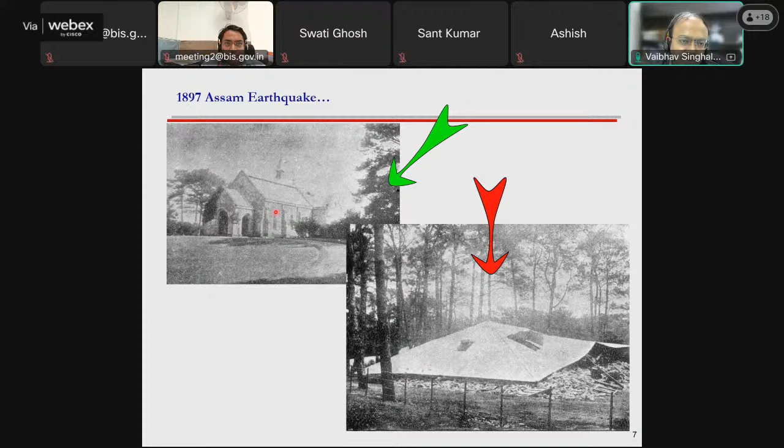So just have a quick glimpse. If you remember, in 1897 - of course you have not heard about this, but if you read in some books - one of the great earthquakes changed earthquake engineering around the world and also in India. This earthquake was felt at this location in Assam, and the shaking or intensity was even felt in Gujarat. There were numerous examples. At that time, masonry was the most popular construction method, and masonry performed quite poorly. You can see photographs of before construction, after construction - poor performance of masonry everywhere.

Even in the earthquake of 1934, after about 40 years, masonry performed similarly, quite poorly, in most earthquakes. Around the world also, in US, California, Japan, at many places, you will see similar pictures that buildings did not perform well.

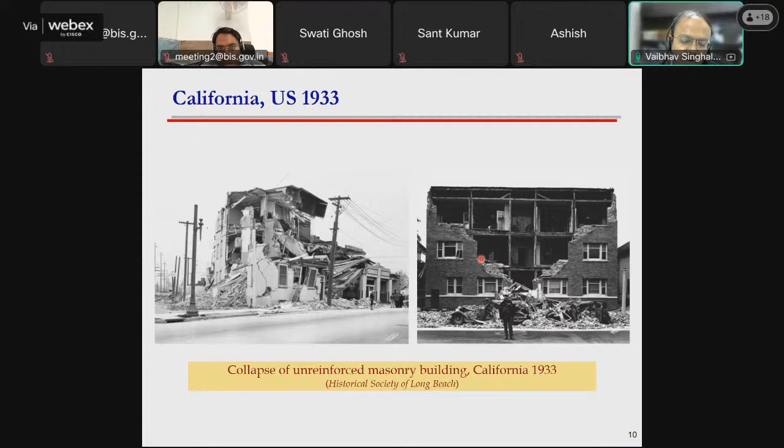So as the previous speaker was talking about, being an engineer, your role is to ensure safety. So it is important that we learn about masonry and ensure safety.

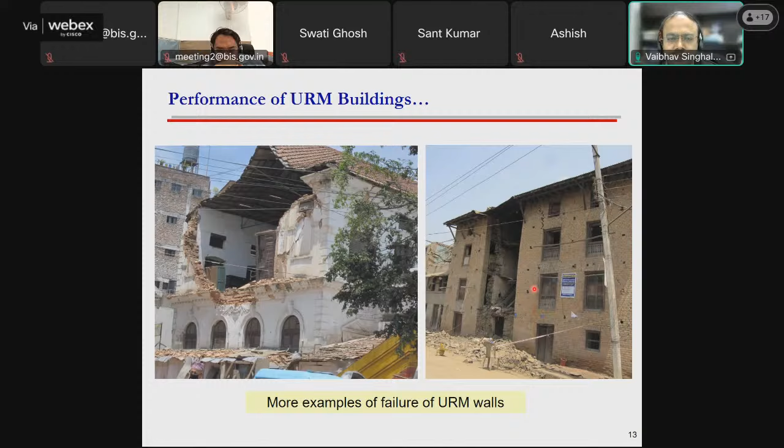Now some students say, sir, you're talking about 100 years ago, 125 years ago, but what is the current state - how are our masonry structures performing in earthquakes? So in the recent earthquake in Nepal, 2015, again we have seen similar pictures. The masonry structures completely collapsed, either during the earthquake or during heavy winds, heavy forces, or because of deterioration, poor maintenance, durability aspects.

So always we are seeing the same story - poor performance of masonry buildings. So that is what BIS is trying to address now, to strengthen our masonry codes through NBC, through specialized codes, where engineers can learn how to make good masonry buildings, either in a zone where earthquakes are not very prominent, or in areas where earthquakes are also very frequent. And you should also understand that masonry in India, and also in major developing countries, still always remains a first priority. Many constructions in villages, in rural areas, in urban areas, are done using masonry, or in some form we are using masonry - either as an infill or as a load bearing member.

So now talking about this NBC, where we are discussing the structural design aspect, which is Part 6, in which we have Section 4, which focuses mostly on masonry.

Coming to the scope of this NBC part 6, section 4, it gives us detailed guidelines and design aspects for unreinforced masonry, load bearing and non-load bearing. If we have infill walls or non-load bearing walls, it covers how to design and fix the sizes of these walls, and how we can select the material.

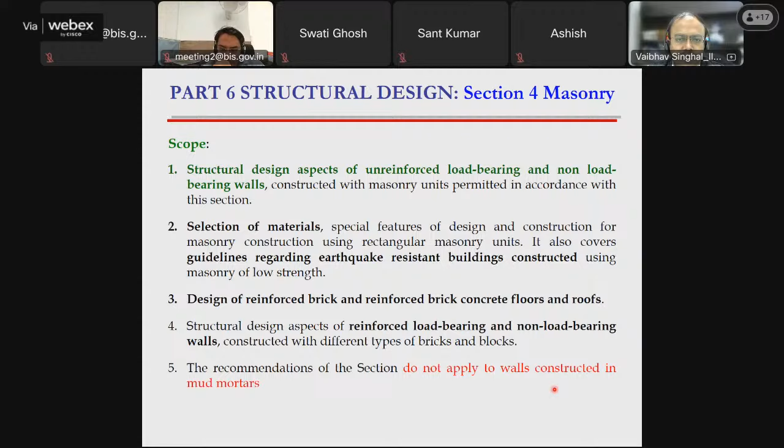This recommendation and the code section do not apply for walls made using mud mortar. Earlier, in many villages, people used mud mortar. It is not covered because mud mortar has different behavior and very low strength, so the code discourages use of mud mortar for structural masonry.

Whenever you start any design, you think about what kind of material you can use, whatever is available nearby. Nowadays so many types of masonry units are available - clay bricks, red clay bricks, fly ash bricks, lime bricks. The code gives good freedom to use different types of blocks or bricks.

You have also seen AAC blocks, autoclaved aerated cellular concrete blocks, which can be used. Concrete blocks and stabilized soil blocks can also be used for construction of masonry buildings. Some types of bricks are not allowed, like previously used masonry units, unless they are thoroughly cleaned. Gypsum partitions can only be used for non-load bearing construction, not for load bearing.

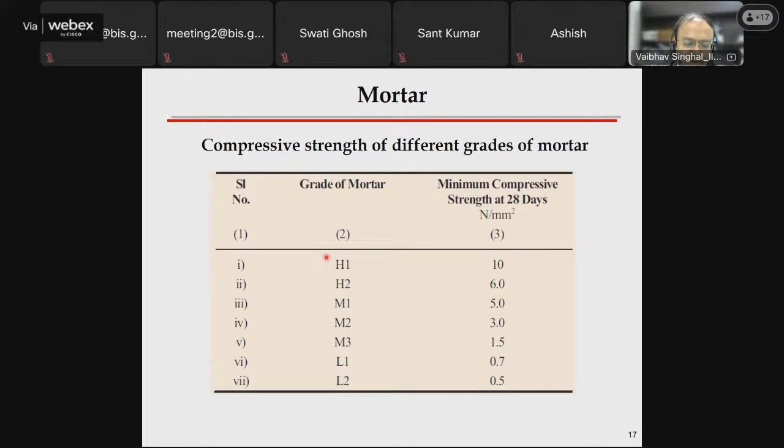Coming to mortar, I hope you all know about it - mortar is a binding material which binds two brick units. Mortar has been divided into different grades, starting from H1 to L2. H1 means the higher grade with higher compressive strength. H1 mortar requires minimum strength of 10 MPa, and L2 is 0.5 MPa. Depending on the type of masonry construction, the code provides guidelines on which mortar is good for which type.

The code also provides a tool - if you want to choose an H1 mortar targeting a strength of 10 MPa, it tells you what proportion of cement, lime, and sand you should use. This is how the code provides detailed guidelines, so you can get all the information at one place. That's the beauty of NBC 2016 section 4 for masonry - based on requirement, you can fix the mortar proportion for construction of masonry buildings.

So which mortar should you use? If you're using mortar for plaster or render, you have to use at least a mortar grade more than M3, preferably M2. Without protection, if there is no plaster, you have to use mortar of M2. For load bearing walls, it is set at M3 or preferably more than M3.

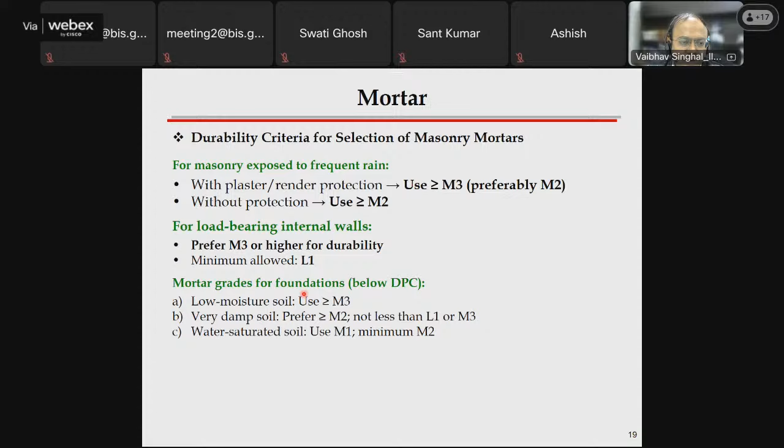Minimum code allowed is L1, but we generally suggest the structural engineer should use at least M3 grade mortar for the construction or suggest for the design. For foundation, one can use M3 mortar. So this is all covered in the NBC.

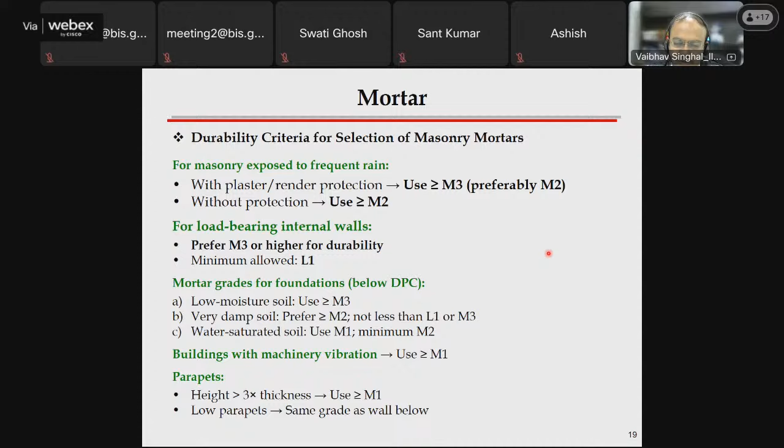I will not go into detail, otherwise it will take a lot of time. So all these recommendations are given in the code as to which type of mortar you can use, depending upon the durability aspect and the exposure condition of a building. Similarly, we have concrete grades for different exposures, specifying the minimum grade of concrete you can use. So similarly here also, you can fix the type of mortar.

Coming to the actions, the loads, how the loads are transferred and what type of loads a wall can be subjected to. The wall mainly resists three types of forces. You can have a vertical compression, as shown here with the green arrows. Masonry walls can have a vertical compression, and they can also have out-of-plane shear and bending.

Out-of-plane forces can be there, and they can lead to eccentric vertical load, due to either eccentric vertical load or transverse load, and the wall can also have in-plane shear. Out-of-plane loads are more common, especially during earthquakes, during wind, and during other kinds of loading. So you have to design your wall for all these three types of forces.

For a normal masonry building, the compressions are more prominent, so you have to take care of compression. But if the loads are eccentric, and if you are designing a building in seismic zone 5 or seismic zone 6, you have to consider the in-plane forces and the out-of-plane forces because of the earthquake loads and the wind loads also.

Now, walls have been primarily classified into two categories. If you see NBC or IS 1905, it says bearing wall or shear wall. Bearing walls are prominently designed for gravity loads, and if the walls are subjected to lateral loads, we call them shear walls and design them like a shear wall.

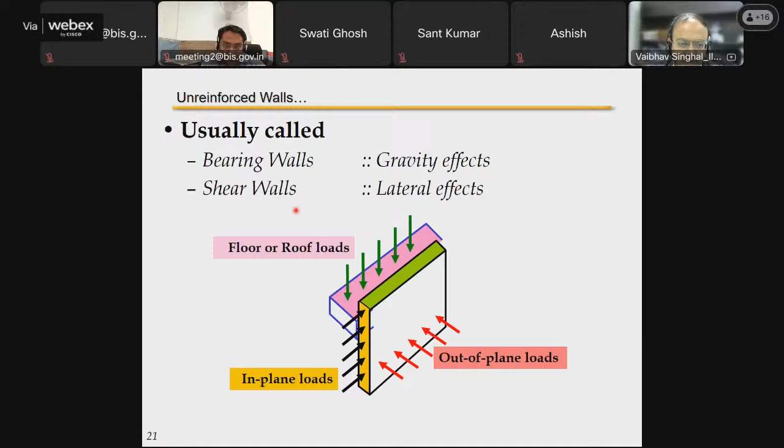The code starts first, either IS 1905 or NBC 2016, with some general design considerations - that being an engineer, first of all you have to ensure that the building or wall satisfies some minimum requirements to ensure the stability of the structure, so that you can have proper support.

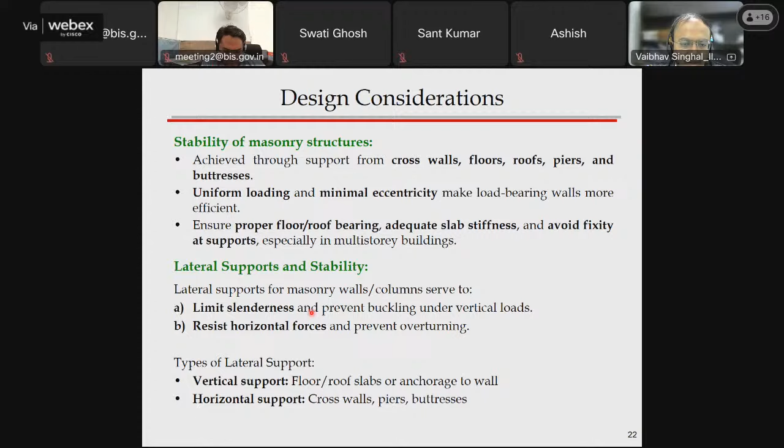You should have uniform loading and minimum eccentricity. So it is important that you start with the initial planning in such a way that you can ensure good stability. You can provide some lateral supports so that the slenderness can be limited, and then it can have some good resistance to the horizontal forces.

I will give you some examples of what the code means. Suppose you are having a slab which has to be supported over a wall - the code says the slab should have at least 90 mm of support. If that is not possible, you should put a sufficient number of anchors so that the slab or beam is properly supported over the wall.

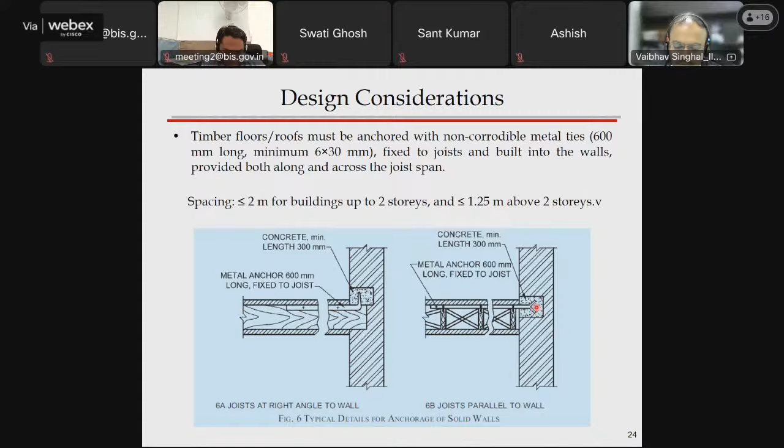Some examples - suppose this is your wall and this is your timber floor or different type of floors, this is how it can be connected to the masonry walls. Some more examples of timber and how it can be connected to masonry walls. So these are some of the basic requirements - to ensure proper load transfer, good stability, and good support for various forces.

Now, similarly, if you have a quite long wall - if the length of a wall is quite large - the code says you can have some buttresses, but those buttresses should have minimum dimensions: 1/5 of the height of the wall, and the thickness of the buttress should be at least half the thickness of the wall, or at least 90 mm.

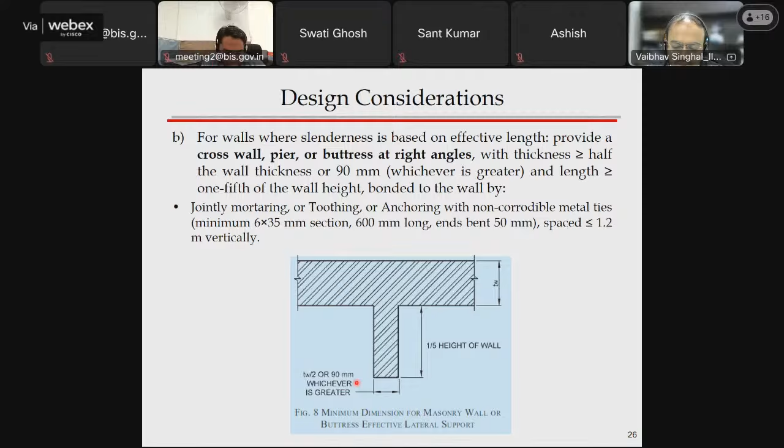So these are all some of the basic general design considerations which the code suggests have to be followed for the stability, for good load transfer, and for good response of a masonry building.

The code also limits how much the minimum thickness should be, depending upon your use and the story height. Suppose the story height of a wall is 5 meters, then the minimum thickness should be at least 300 mm. These are all the recommendations given so that one can start the basic design of a masonry wall.

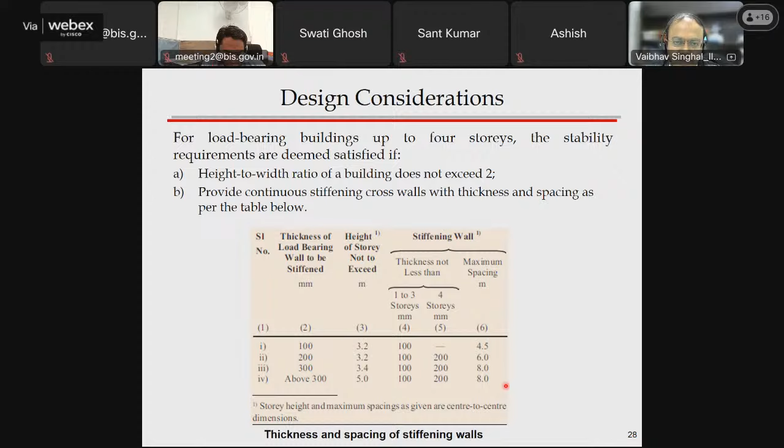Similarly, you can have a cross wall also. In many cases, like suppose you're having a classroom or a school building, you can have multiple cross walls. In those cases, the recommendations given by the NBC tell you how the cross wall should be connected. All these things are your basic recommendations.

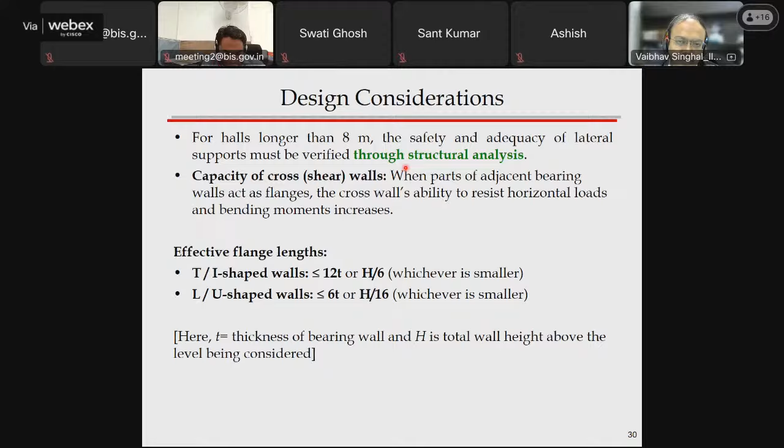The code also says you can currently design, but the code limits that you cannot go more than 8 meters. But if you are going more than 8 meters, the code says it has to be designed and the safety has to be ensured by performing proper structural analysis.

Suppose you have these types of walls, I-type walls, or where two walls are meeting parallel walls. How do you design them? For designing, you can consider some effective flange thickness or effective flange width, similar to what you do for a concrete structure also. The code also provides recommendations on how you can consider the effective overhang or the effective flange width.

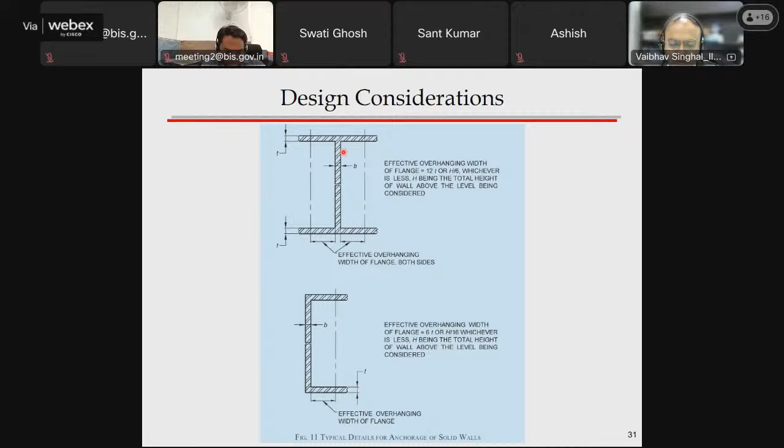Then there are some more recommendations. If you have a basement wall, how much should be the minimum thickness of a basement wall? Basement wall thickness has been kept on a slightly higher side, minimum 300 mm, and it can go up to 400 mm depending upon the type of loads.

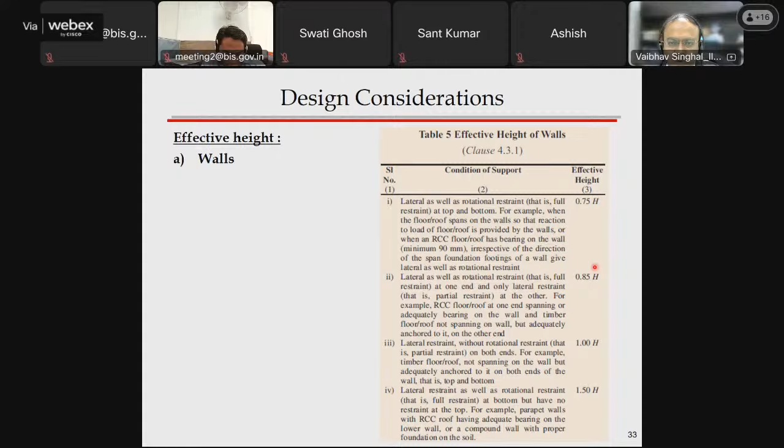Then you have the recommendation for how you can find out the effective height. Effective height, depending upon the support condition, you can decide. You can use 0.75H when it is supported on both ends, and similarly for a pinned end and for free ends, this is how the effective height can be calculated.

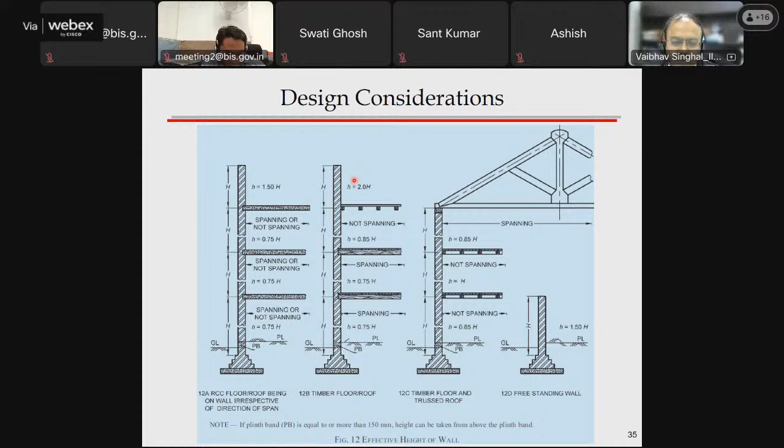The code also explains using various pictures, because whatever I previously showed here are kind of idealistic boundary conditions. Suppose you have a wall with a slab in a multi-story building—how do you find out for which case you will take H equal to 0.75, and for which case you will take H equal to 0.85? A quite detailed explanation has been given for how you can decide the effective height of your various walls for design purposes.

Similarly, a detailed example is given for the columns also. For openings, the piers which are adjacent to the openings—how you can consider their effective height. All these recommendations are given by the code for finding out the effective height.

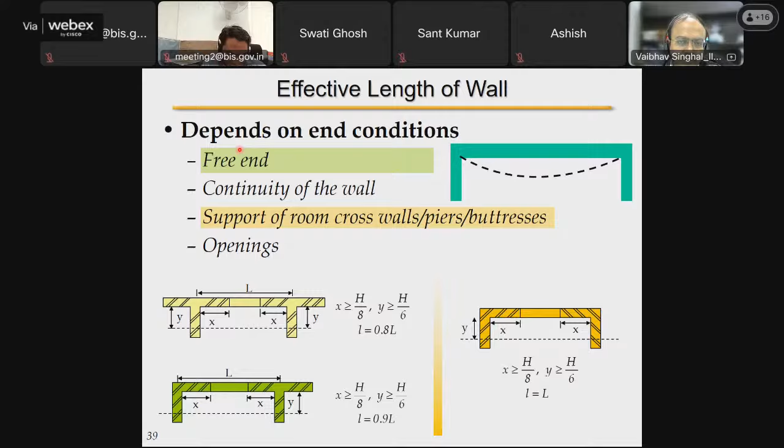Similarly, for the effective length also, depending upon the boundary condition, depending upon whether you have openings or buttresses, you can find out the effective length of a wall. These recommendations are also given by the NBC or IS 1905, depending upon the end condition. These are the various guidelines and tools which you can use to find out the effective length, which can be used for the design.

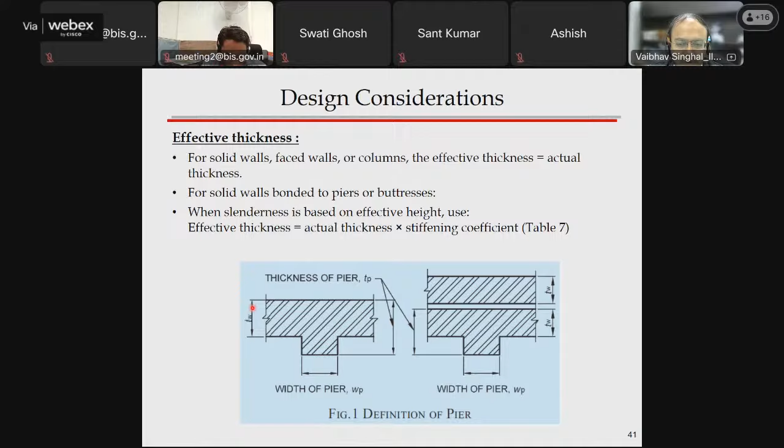Similarly, for effective thickness: suppose you have a small buttress, and the total pier thickness is TP, how do you find the effective thickness of the wall? Considering these kinds of projections in the design is difficult, so one has to find the equivalent or effective thickness. For that, the code has given a tool. Depending upon the value of TP by TW—where TP is the thickness of a pier and TW is the thickness of the wall—and depending upon the values of SP and WP, where SP is the spacing between two piers and WP is the width of a pier, you can find out how much the effective thickness should be. For example, effective thickness can be taken as 2 if TP by TW is more than 3.

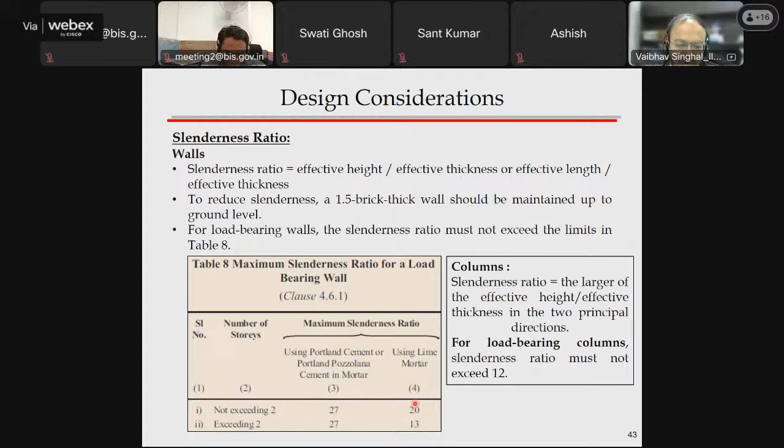These are the various limits on the slenderness ratio. If your number of stories is more than 2, the slenderness ratio should not exceed 27. If you're using lime mortar, because lime mortar has lower bending strength, the slenderness ratio limit is lower for lime mortar use. After fixing the basic dimensions and considering all these basic design considerations, one can move to the design of the wall for given loads.

So if we first talk about compressive loads, you have to find out the compressive strength. The code says you can do a compression test, which is performed using a prism. So you have to make a 5-stack prism, perform a test, and take the design strength as 0.25 times the average strength obtained from the experiment.

Or if it is not known, the code has given a table which can be used, adopted from IS 1905. The same table is given in NBC also. So depending upon the crushing strength of a brick, and depending upon the type of mortar, one can find out the compressive strength of a masonry.

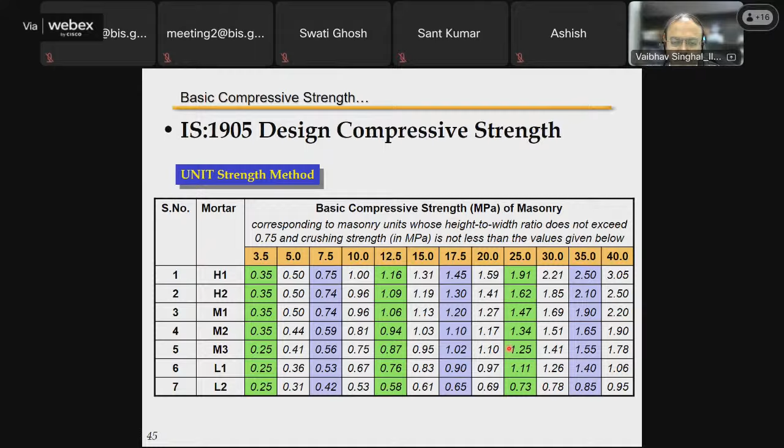So suppose if you are having a 10 MPa crushing strength of a brick, and if you are using M1 mortar, then the compressive strength of a masonry will be 0.96. This is quite a useful table and easy to use by structural engineers. Based on the type of brick, type of masonry unit, and type of mortar, one can find out the basic compressive strength of a masonry. This same table is given by the NBC.

So these are the different tests which you can do. The first test is the compressive test to find out the compressive strength of a brick, called the prism compression test. The diagonal compression test is not included in the current version of NBC or IS 1905, but we are presently revising IS 1905, so it will be included in the new revision.

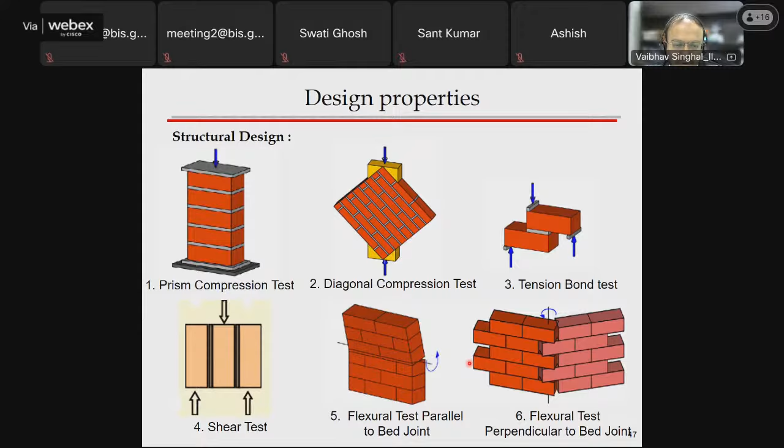Then there's the tension bond test, to find out the bond strength, the tensile strength of a bond, the shear strength, and the flexure strength parallel and perpendicular to the bed joint. All these new tests will be included in a form of an annexure, which we are planning to have in IS 1905.

So after finding out the basic compressive stress, you need to apply some reduction factors. Why are they applied? Because if your wall is slender, it's something similar to if you relate it with concrete. Like you multiply the concrete characteristic strength by a factor of 0.67, then further divide it by 1.5, and you take it at 0.446 in the design.

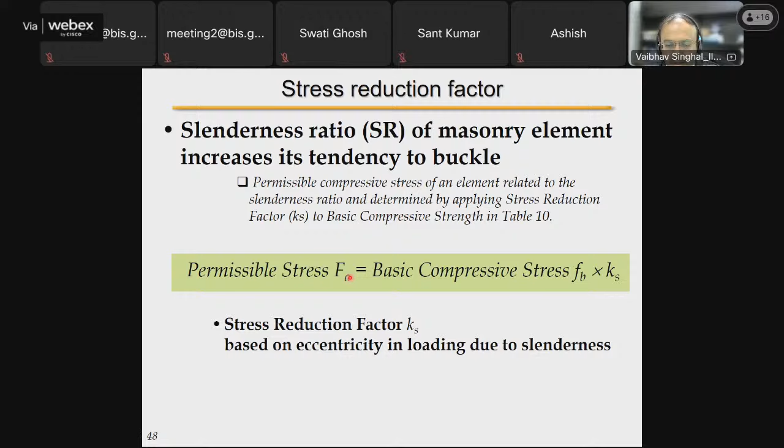In a similar way, to consider the effect of slenderness ratio and the effect of eccentricity, you have to find out the reduction factors. Then you will find out the permissible stress in compression for design purposes. This stress reduction factor, Ks, depends upon the slenderness ratio, starting from 6 to 27, with 27 being the limiting value, and depending upon the eccentricity of the load.

So whether the load is applied concentric at the center of a wall or away from the center, depending upon this, you can find out the reduction factor. Suppose your slenderness value is 10 and the load is applied at 1/6, then the value of Ks is 0.85.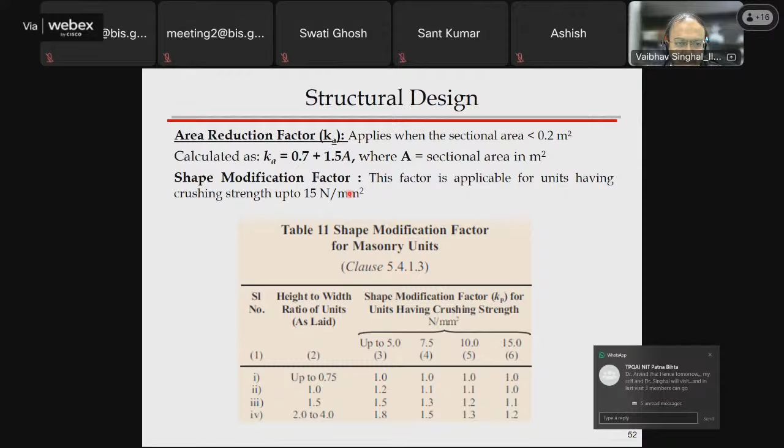So all these things are given in the code, showing how you can find out the design or permissible stress for the design purpose. Further, if the area of a wall is very small, you can also apply the area reduction factor, or the shape modification factor. All these things are given in the code to find out the permissible compressive stress.

And similarly, the permissible tensile stress. Right now, the current version of NBC and also IS 1905 simply provides one design value: for M1 grade or better, the strength is 0.07 when the tension is normal to the bed joint, and it can be taken as 0.14 when the tension is parallel to the bed joint. Similarly for M2 grade mortar, these are the simple recommendations given by the code.

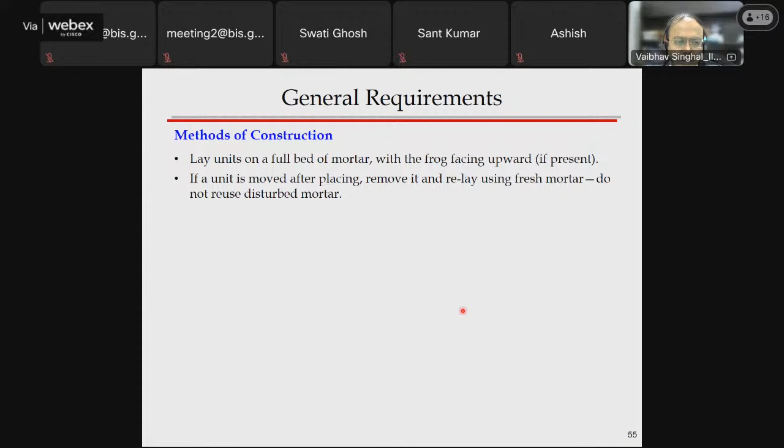And to find out the shear stress, the code has also given some equations which can be used. Then some requirements are given for construction, what good practices one should follow for construction. I will just skip these.

The first part of this NBC section 4 on masonry covers primarily the design of unreinforced masonry (URM) walls. Further on, it also provides the special requirements for earthquakes.

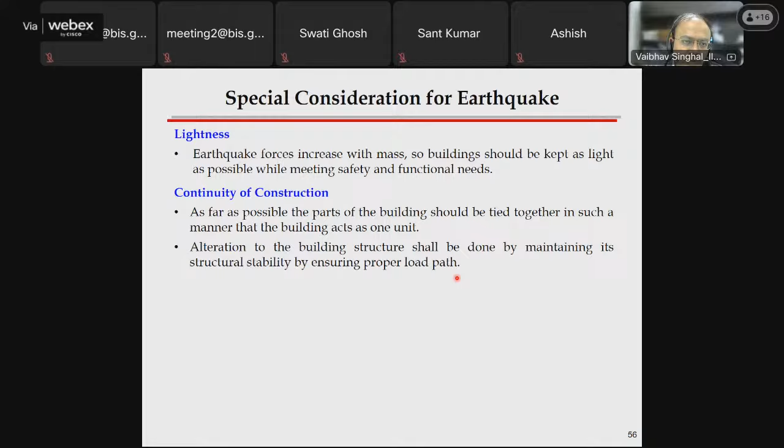For earthquakes, as you know, if we make lighter structures, the earthquake forces and inertia forces will be lower. You have to ensure good continuity of construction, avoid very large projections and suspenders in various parts of a building, and always follow good building configuration.

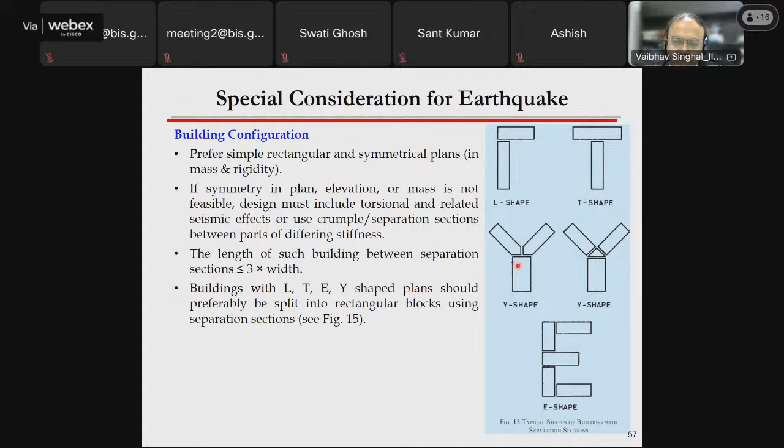These are all covered in the special considerations for earthquakes: you should have regular, rectangular, or symmetrical plans. If you have shapes like L shapes or T shapes, you can break them into two blocks. Similarly, a Y shape can be broken into multiple blocks. This is how you can achieve various shapes by breaking them into different blocks.

One interesting thing adopted from another Indian standard, which NBC has also taken, is that buildings for seismic design have been divided into various categories, depending upon the seismic zone and the importance factor. So if your building has an importance factor of 1, for a given seismic zone, buildings are divided into four categories: B, C, D, and E.

Of course, this will need a revision with the current IS 1893. Building category E means it will have a more stringent criteria for the design, a building category E, right?

Similarly, if a building's importance factor is 1.5, then in that seismic zone you have to design the building considering it as category E.

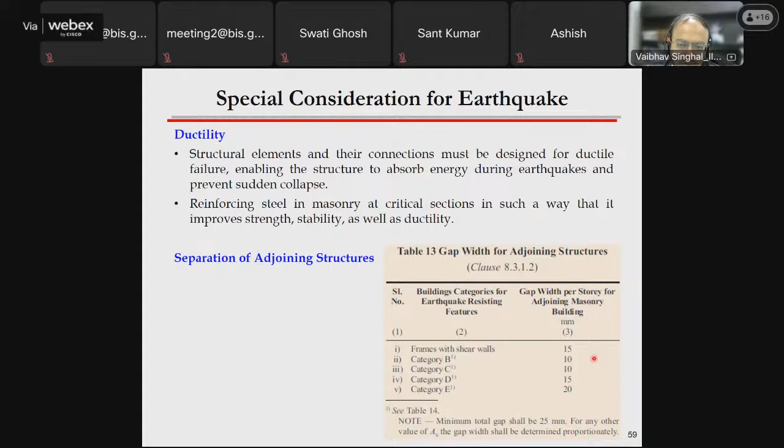There are requirements given for ductility. If buildings are close to each other, how much should be the separation between the two buildings? For category B it is 10 mm, whereas for category E it is 20 mm. So from B, C, D to E, E corresponds to more stringent or stricter criteria for earthquake design.

Then there's guidance on how the separation has to be maintained, and various guidelines are given on the different methods you can use to maintain the separation between two buildings, or to maintain the expansion joint or seismic joints.

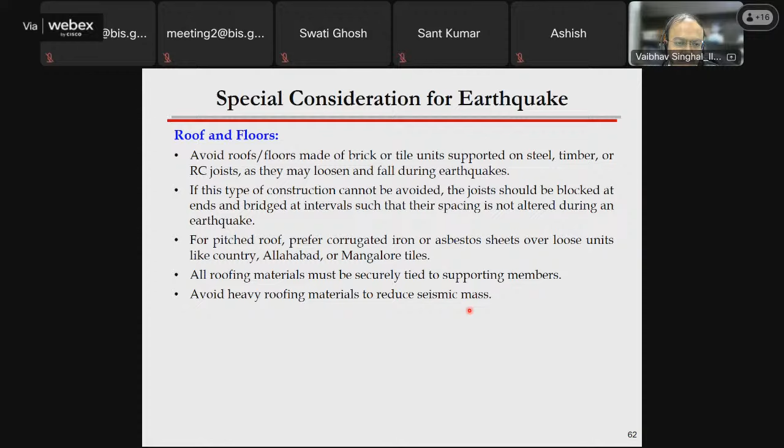There are requirements for the foundation, RC slabs, foundation, minimum thickness - how much the minimum thickness should be. These are considerations primarily from the earthquake point of view, such as avoiding roofs and floors made of brick or tile units supported directly, and various other criteria for good construction practice.

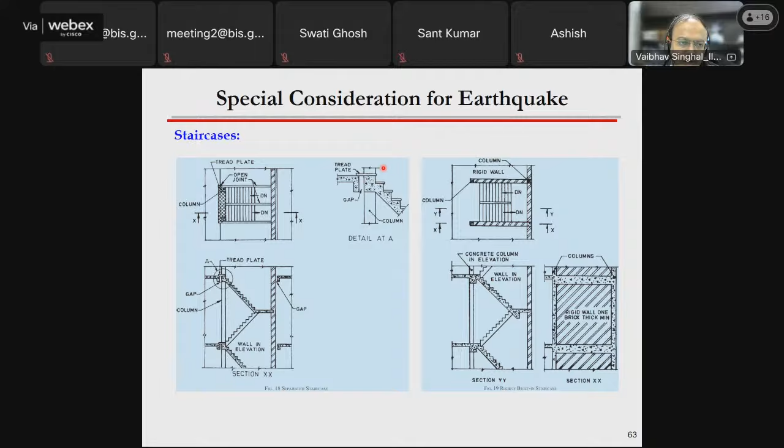Similarly, for the staircase, we always suggest that it should be separated. It can be separated by providing a gap, and continuity can be provided by using a tread plate. All these recommendations have been given by the NBC, taken from the Indian standard.

This is how everything has been provided in quite detail, providing a good and easy tool for the designing of a masonry building.

If you have openings, they can lead to significant reduction in the strength of a masonry building. So the code also gives guidelines on the appropriate size for openings, their location from edges, the spacing between openings, and the height of an opening. All these things have been given by the code in a quite easy and straightforward manner, which you can use for different categories of buildings.

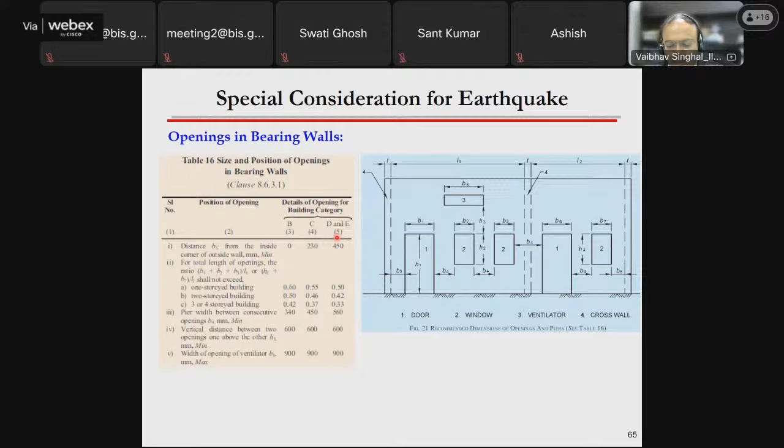If the openings are quite large, you can also provide reinforcement around the opening. So how this reinforcement has to be provided, and how much should be the development length of this reinforcement. All these recommendations are provided so that you can ensure a good performance of a building during an earthquake.

If somebody is planning to strengthen the building, how these strengthening arrangements have to be done is also covered by the code. You can provide seismic bands, lintel bands, floor band, roof band, and vertical reinforcement at the corners. All these recommendations are provided for ensuring the good performance of a building during an earthquake.

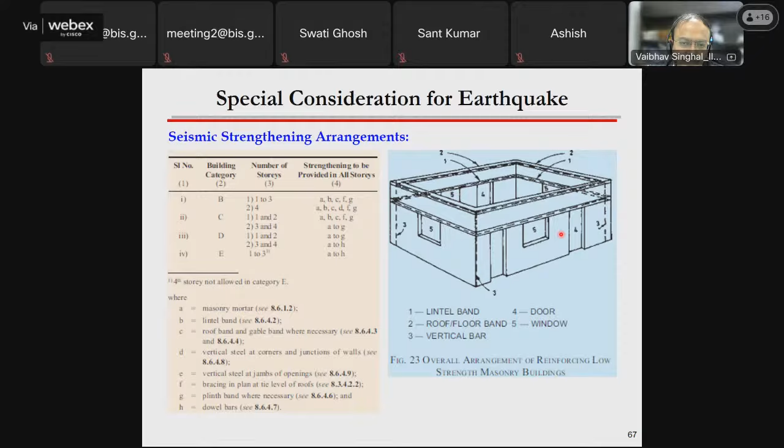What should be the reinforcement in the bands? If your building is in category B, you can even provide 2 bars of 8 mm diameter. This is how you can provide the reinforcement in the bands.

In some cases, one can also use this special type of bond where you can create a pocket at the corners, and in that pocket you can provide the reinforcement. How much should be this reinforcement, what diameter - all these recommendations have also been given by the code. This is primarily adopted; we also call them a Quetta bond. Some modification of that has been given by the code for thin walls.

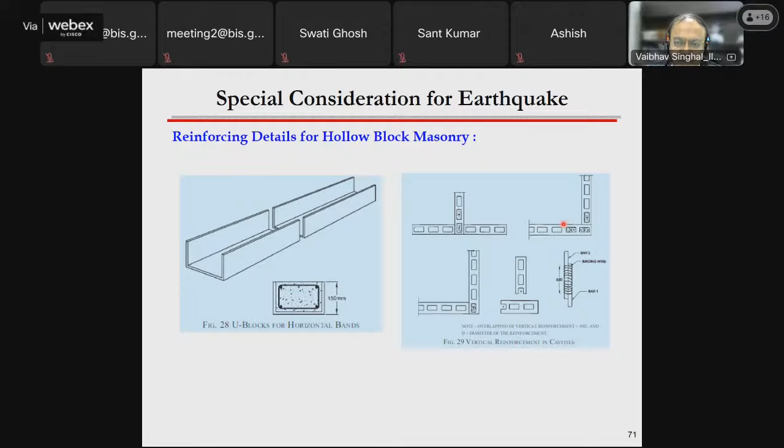The code also encourages the use of hollow bricks, primarily made using concrete. Sometimes clay is used, but clay hollow bricks are not commonly available in India, while concrete blocks can be used for providing the bands and also for providing reinforcement at key locations, especially at the junctions or at the corners of a wall.

The code, NBC, also covers a brief guideline for how you can construct brick panel floors. However, this construction practice is not used these days. But if you have limited availability of material like concrete, you can also make reinforced brick floors. For this, the code provides guidelines on how to make these prefabricated brick panels or prefabricated brick floors. This is how you can ensure seismic resistance in these floors.

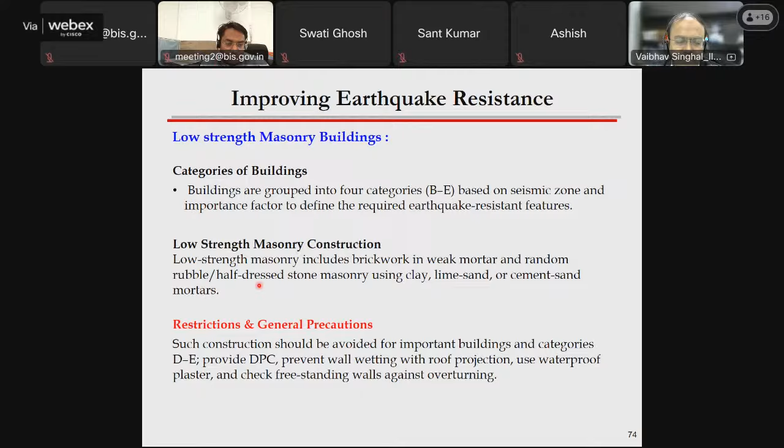Coming to the next part of NBC, it also provides guidelines on how to improve the earthquake resistance of low strength masonry. As I showed in the initial slides, there are many masonry buildings in India in various places which need strengthening. The code says that for low strength masonry buildings, you can adopt some guidelines to improve their performance so that they should not collapse during the earthquake. However, these guidelines are not applicable for important buildings, especially which come under category D and E. These are most applicable for buildings in B, C category.

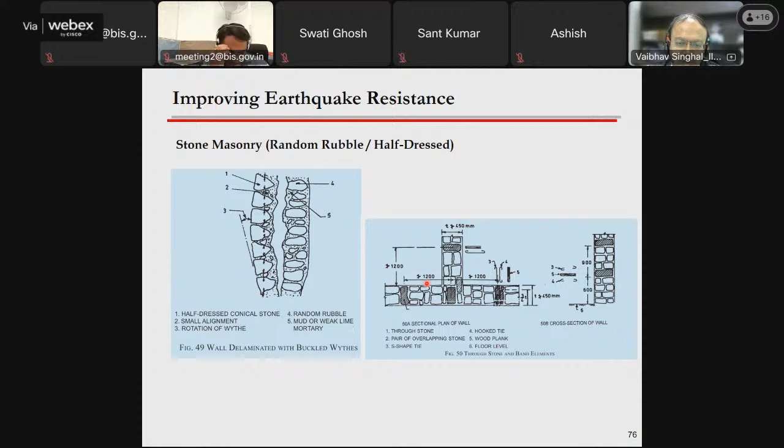Stone masonries are very common in rural and hilly areas. How can you strengthen these stone masonry buildings? The problem with stone masonry buildings is that they have multiple layers, and it is commonly seen that they separate from in between - various layers get separated during the earthquake or during shaking. You can improve their performance by providing bands, or by providing through-stones at various locations.

Regarding openings, how you can decide the size and location of openings - again, based on category B, C, and D, you can decide how the opening should be located. All these recommendations are given for how you can improve the earthquake resistance of a building. I'm not going to go into detail, but all these clauses and recommendations are given in Section 4 of masonry.

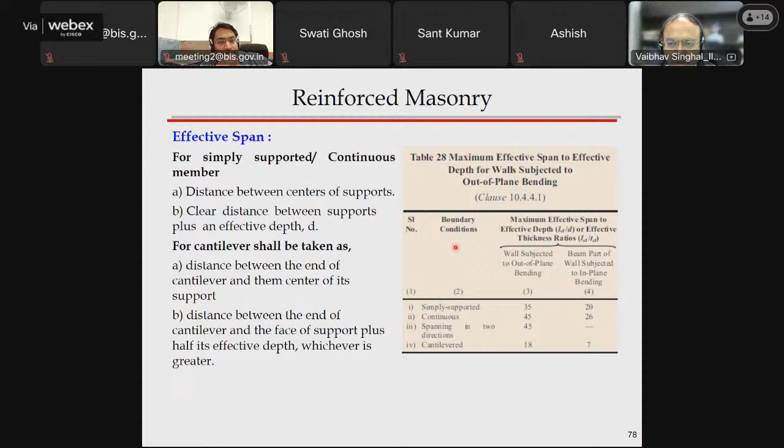Then one interesting thing NBC has also included is the design of reinforced masonry. We still do not have a dedicated Indian standard code for reinforced masonry, but NBC covers that, providing guidelines on how to design reinforced masonry structures and what should be the minimum requirements - effective spans, slenderness ratio, and what should be taken if you are designing a reinforced masonry wall or reinforced masonry column. All these things are given for reinforced masonry.

In this, however, the code still adopts the working stress method of design, because our current IS 1905, the unreinforced masonry code, is on the working stress method. That is why you can see all these permissible stresses in the bars - taken as 140 MPa for MS bar, 230 MPa for HYSD bar.

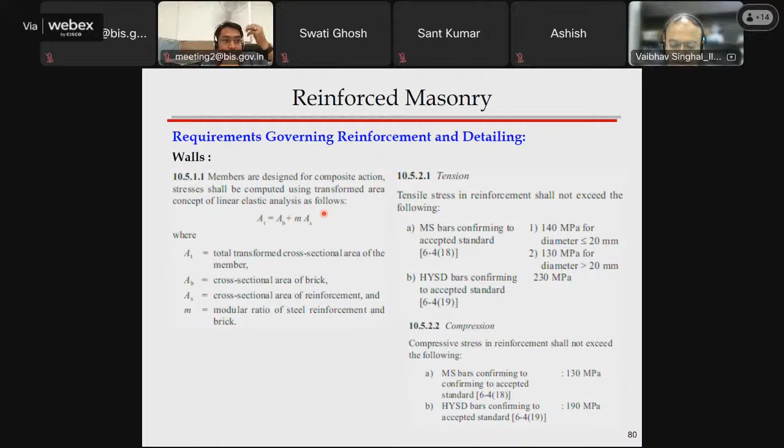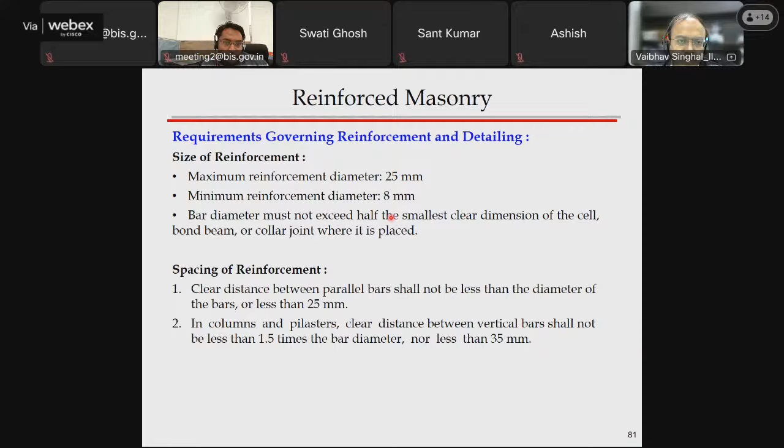These still have to be updated to a limit state design. The reinforced masonry code, or NBC clauses and criteria, is still using the working stress method. So what should be the size of reinforcement, maximum diameter, minimum diameter? All these recommendations you will see in the reinforced masonry section of NBC, this part of NBC. How much should be the development length? These are quite similar to what we use for reinforced concrete using the working stress method.

How to find out the shear minimum requirement for shear reinforcement, AV minimum. Then detailing, how you can do a detailing.

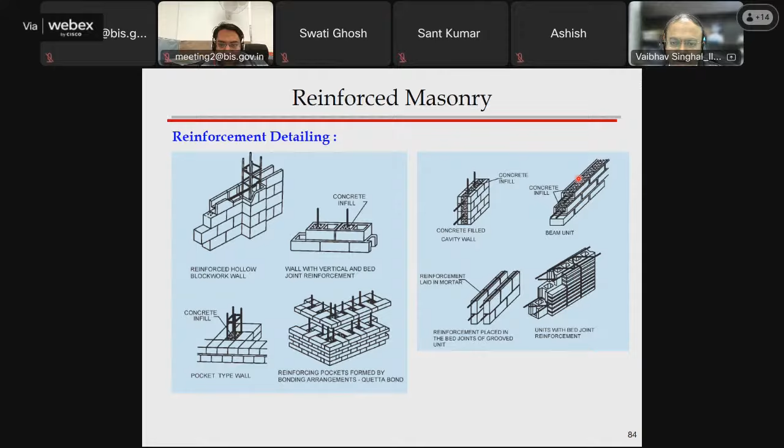You can have reinforced concrete blocks. The concrete blocks are hollow concrete blocks where you can place the reinforcement for a column, reinforcement for a beam, and you can also place the reinforcement along the length of a wall. You can also use the Quetta bond type of construction, creating a pocket and then providing the reinforcement. So this is how the reinforcement can be detailed. Various options, various types of detailing one can use when designing it as reinforced masonry.

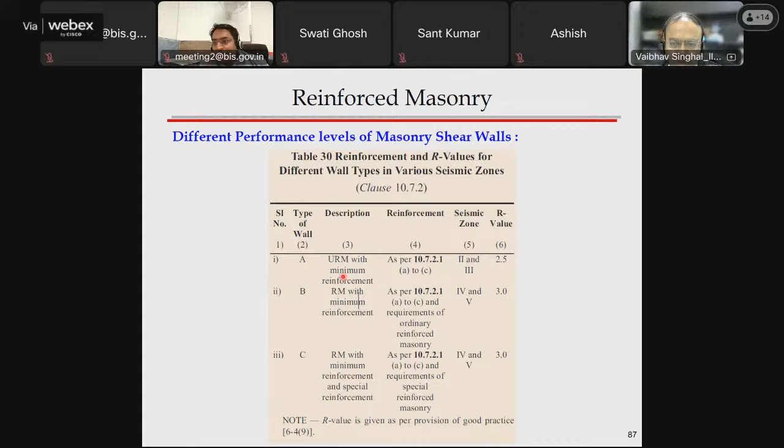So different performance levels which can be expected, for suppose different types of walls. Again, the detailing around the openings, how much reinforcement you have to provide at the edges of the openings. These detailings are also quite similar to how we design reinforced shear walls.

The reinforced shear wall and reinforced masonry shear walls nearly have a similar kind of design criteria and design requirement. Now this NBC has also included, considering the popularity in the industry, a new type of bond which we call a rat trap bond.

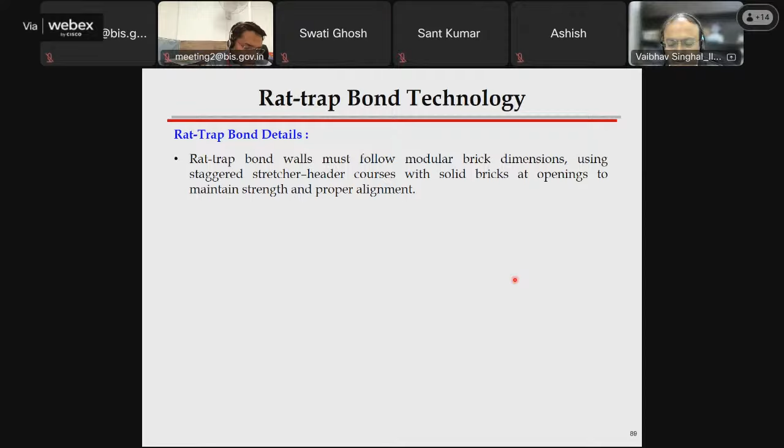Rat trap bond is nothing but you have to lay the bricks in such a way that a brick will be laid on its edge, and when you lay the brick on the edge, you will have a pocket. These kinds of pockets can be used for providing the reinforcement, and they also provide better thermal insulation because of these cavities.

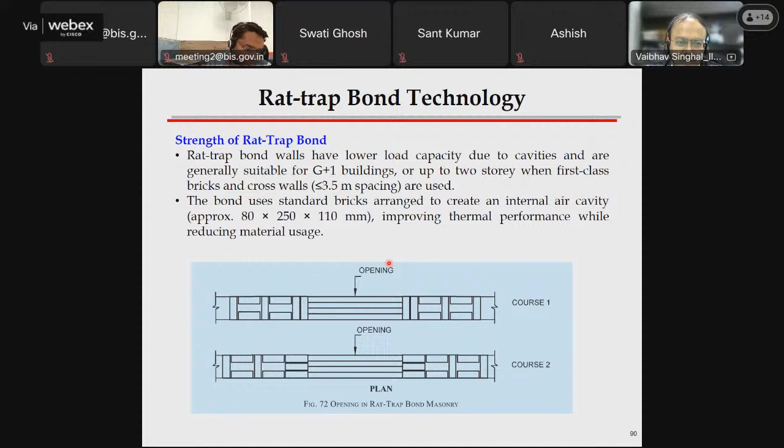So this kind of rat trap bond is also becoming popular, and the code gives a detailed guideline on how you can find out the strength of rat trap bond, what type of testing you can do to find out their compressive strength. These are the various tests which can be done, and these are the various bond patterns you can use to have this rat trap bond technology.

Very briefly, I've shown what are the different things which have been covered in the main body of NBC in the masonry section. It also has various annexures for finding out the strength for eccentricity of the load, and finding out the basic compressive stress using the prism test. Right now only the prism test is included.

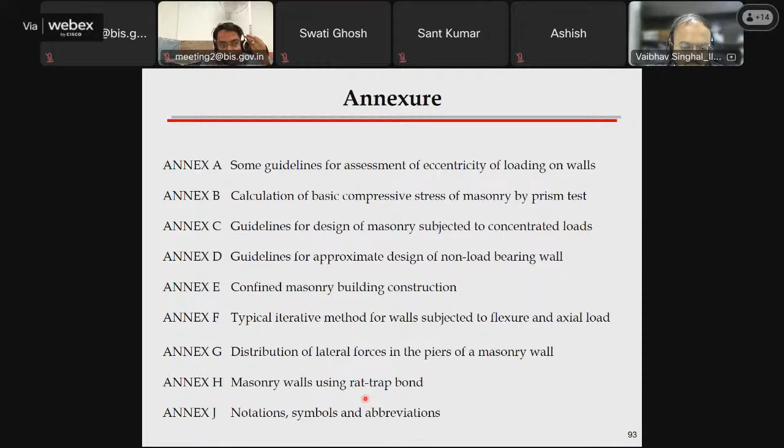Then if you have a concentrated load, how you can design the masonry, approximate design for non-load bearing masonry. The code also includes a new type of construction, confined masonry, which I will briefly talk about. We now have a dedicated Indian standard on confined masonry, and it will also be included in the next revision of NBC. Then some methods, iterative method for flexure design and axial load design, distribution for lateral forces. Masonry walls using rat trap bond, more detailed designs are given in Annexure H.

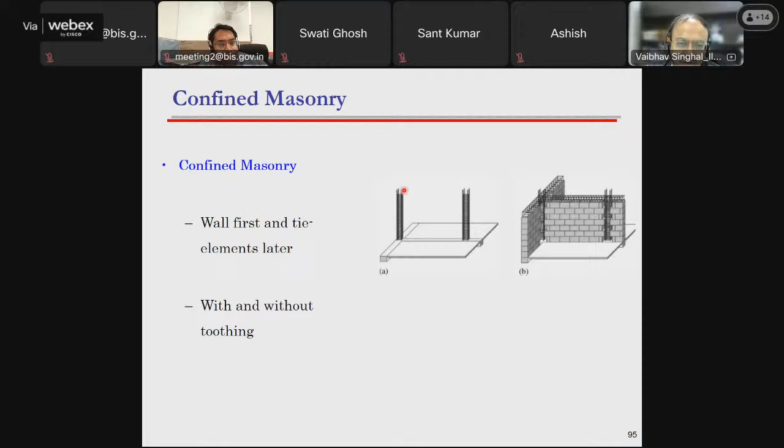Now, to discuss briefly about confined masonry, because this is a kind of new construction, and recently we also have an Indian standard on confined masonry construction. Confined masonry construction is a slightly different type of construction where you have the masonry wall. First of all, what we do is leave the reinforcement coming from the bottom beam or from the foundation. Then we construct the masonry wall, and after the construction of the masonry wall, we lay the concrete.

So the concrete is poured, and the advantage of this type of construction is that since masonry has very limited tensile capacity and flexure capacity, the tensile strength can be provided by reinforcement, which will also provide good deformation and ductility to the walls. The bond between the RC elements and the masonry wall will also be good, and this can be achieved by providing shear keys.

So this is a kind of new construction which has better performance than unreinforced masonry and is quite easy to construct. In this, we build the wall first and the tie elements later. These reinforced concrete elements are called tie elements.

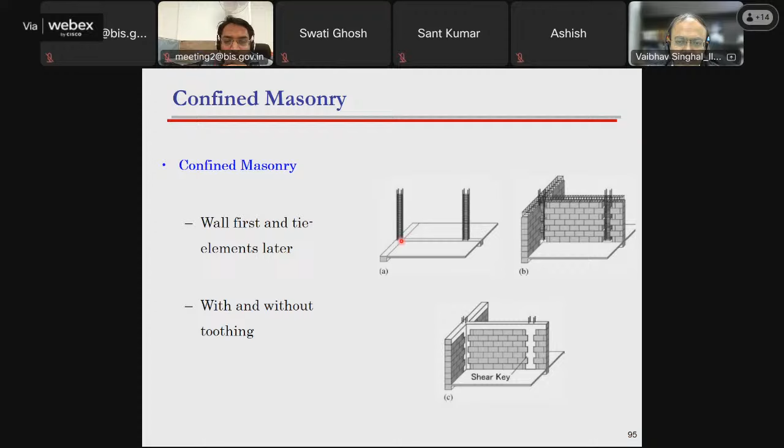Their main purpose is mostly to carry the tensile forces or tensile stresses. Masonry will be the main load bearing member. Most of the force will be carried by the masonry, whereas tensile stresses or flexure stresses will be carried by these tie elements. So the concept is why we call them confined.

It is something like a parcel box - you put a string around it to confine the box so that it should not get open or disintegrated. A similar concept applies for confined masonry, where the tie elements, these reinforced concrete elements, will confine the wall, tie the walls together, and avoid the sudden failure of the walls during an earthquake.

So this construction is becoming quite popular. It is easy, and masons who know how to make a masonry wall can also learn the construction of confined masonry quite quickly because they do not need special shuttering.

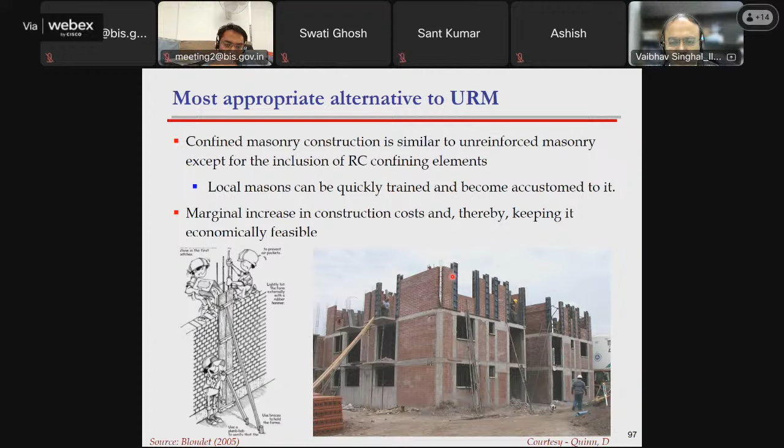Generally for a column you need shuttering, for a beam you need proper shuttering. But in the case of a confined masonry wall, you put a shuttering plate only on two sides or three sides and you can do the construction. The beam will be supported over the wall, so for that you also do not need very sophisticated shuttering or formwork.

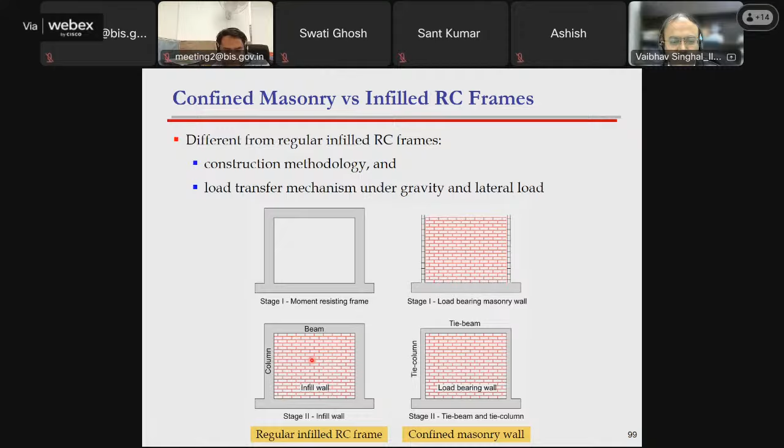These confined masonry walls look similar to infill frames, reinforced concrete infill frames, but they are totally different. In the infill frame, we make the frame first, whereas in confined masonry, we make the wall first and then the tie columns later. But in the case of an infill frame, we make the infill wall later. So this is how the regular RC infill frame and the confined masonry walls look different.

Their force transfer is also quite different. In the reinforced concrete RC frame, force transfer is quite complicated because of the separation of the wall from the frame, whereas in confined masonry, the force transfer is quite straightforward - it is more or less like a reinforced concrete shear wall.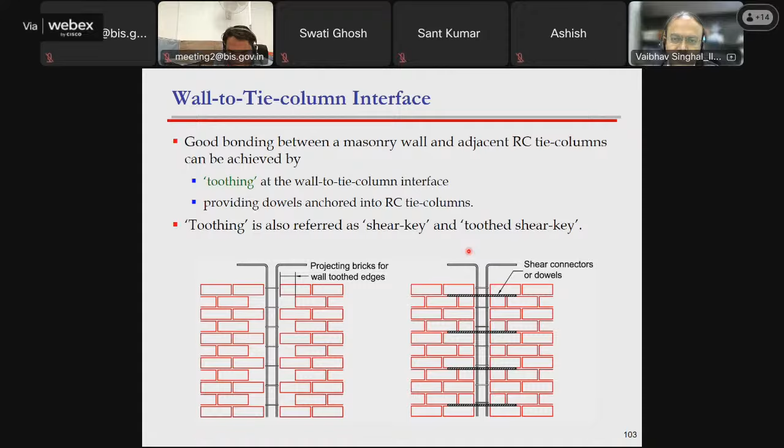So it is a good construction, it provides better performance during earthquakes. Also the good thing about this construction is that you are designing the masonry wall as load bearing, so you do not need a sophisticated design for a frame. You do not need to do frame analysis, transfer forces, and design the frame as a special moment resisting frame or an ordinary moment resisting frame. So this is the beauty of confined masonry - the design is much easier.

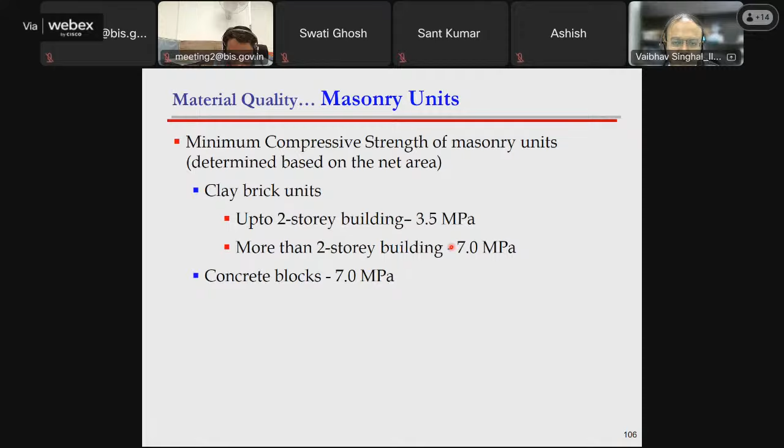The current NBC covers in an annexure what type of bricks and what type of mortar you can use. Since you are designing it as load bearing, there is a requirement that brick strength should be at least 3.5 MPa up to 2 stories. For more than 2 stories, you should have at least 7 MPa. All these requirements are given in the code, including what type of mortar.

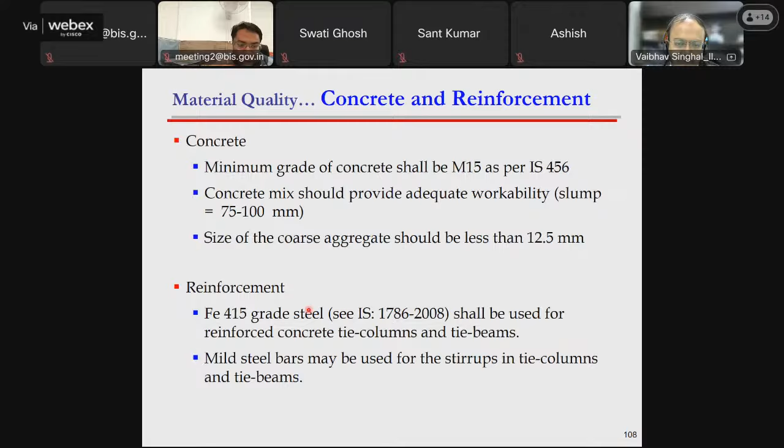You can also see there is now a dedicated code for confined masonry, but all these things are also available in the NBC, including grade of concrete. Since the concrete elements are not load bearing, you can even use a lower grade of concrete, M15, and reinforcement FE415 or 500 - different grades of reinforcement are also allowed for use.

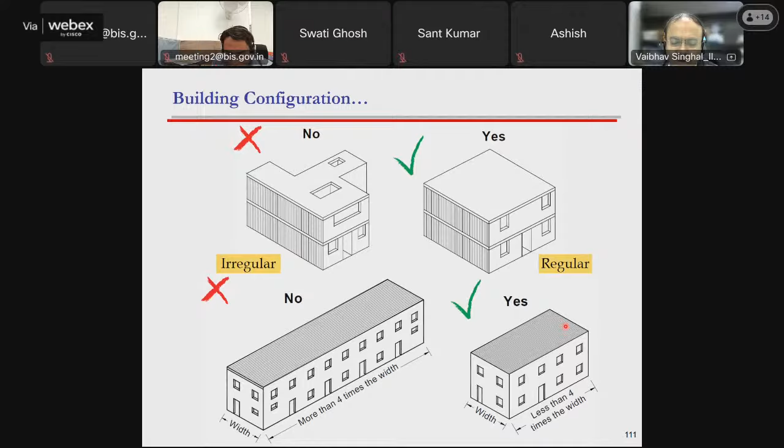Again, the configuration - as we discussed earlier for unreinforced masonry building, similarly for confined masonry, the more regular and symmetric the shape, the better performance you can expect from a building. You should not have a building which is too long, or one with too many irregular projections or offsets. It is better to have a regular, rectangular building configuration.

This is the preferred configuration for a building. The wall should be continuous if you have a multi-story building, so discontinuity should be avoided. Openings should be placed as symmetrically as possible - inadequate location of openings like this should also be avoided.

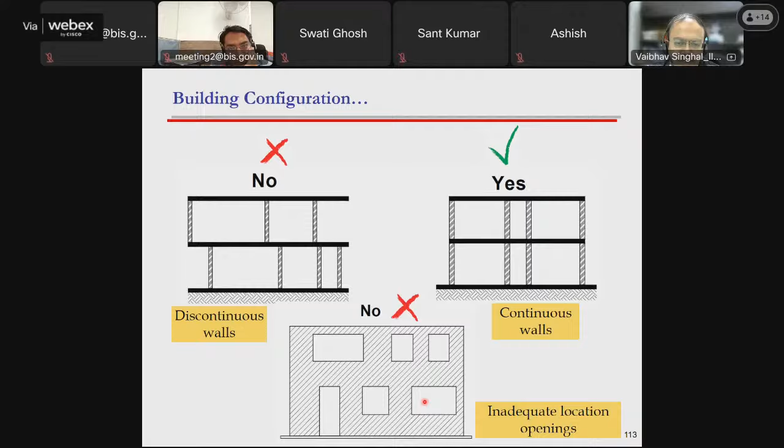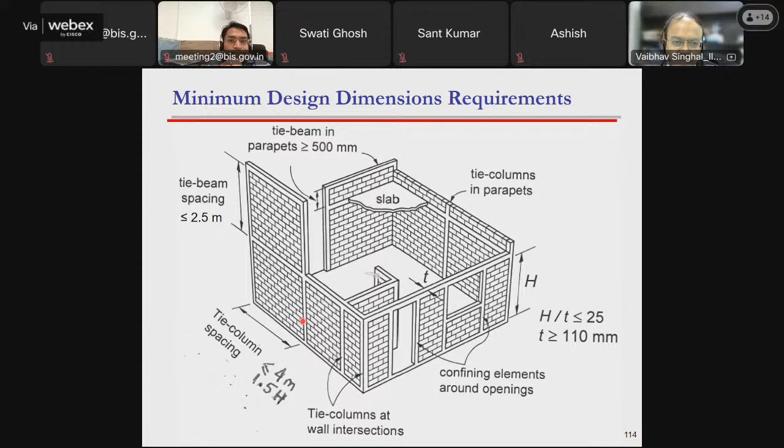All these things are covered by the NBC, the code dedicated to confined masonry. These are some of the minimum design requirements - the tie columns, these vertical elements, should have a spacing of not more than 4 meters, or less than 1.5 times the height of the wall. At every corner and edge you should have a tie column, because edges and corners are generally highly stressed where cracking can start. Wherever there is a possibility of cracking or damage, you can provide tie columns at various locations.

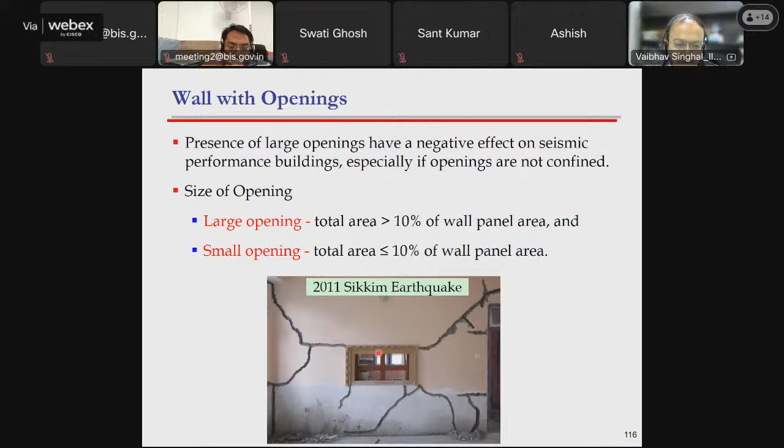Special consideration for openings has also been given in the confined masonry section, which says the opening has to be properly confined - meaning you should have a confining element above and below the opening. You can see this picture from the Sikkim earthquake, showing that if you have an opening, cracks can go all the way from the corners of the opening. To avoid such cracking, confining elements can be provided - horizontal bands, continuous horizontal bands, or vertical elements around the opening.

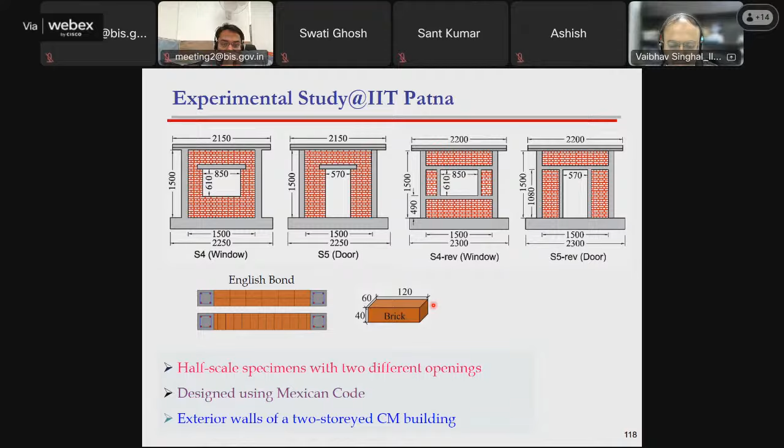We do a lot of research here at IITs, testing which configuration is better. I want to show you some results so you can appreciate the role of these confining elements. We have these two walls - one with no confining element, another with window opening and door opening, with confining elements at the top and bottom of the opening. These are the bricks used for construction, and we used the English bond. Let's see if this video is playing.

Okay, it is not playing. Let's move on, no problem.

One can compare the response in this figure. The green curve is for a wall without a confining element above the opening, and the dark blue curve is for the wall with confining elements above and below the opening. You can see there is significant improvement in performance - for the wall with the window opening, the capacity is more than 2 times higher. For the wall with the door opening, which only has the band or confining element above the opening, there is also significant improvement, more than 1.5 to 1.6 times. So if you provide these confining elements with proper design, you can ensure quite good performance from the walls.

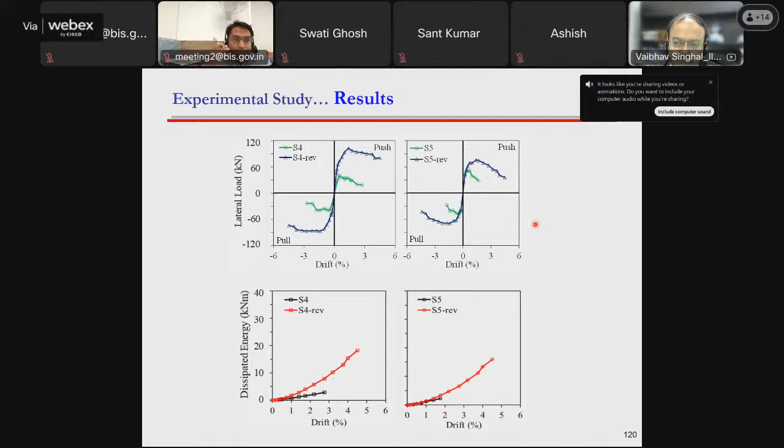So these are the guidelines given by the code for how you can provide the confining elements. If the openings are very large, if the opening covers more than 25% of your total wall elevation area, you should have horizontal bands. If the openings are smaller, between 10% and 25%, you can have vertical bands, and if the openings are very small, there is no need to provide confining elements. So small openings are not a problem; they generally do not have a negative influence on the performance of walls.

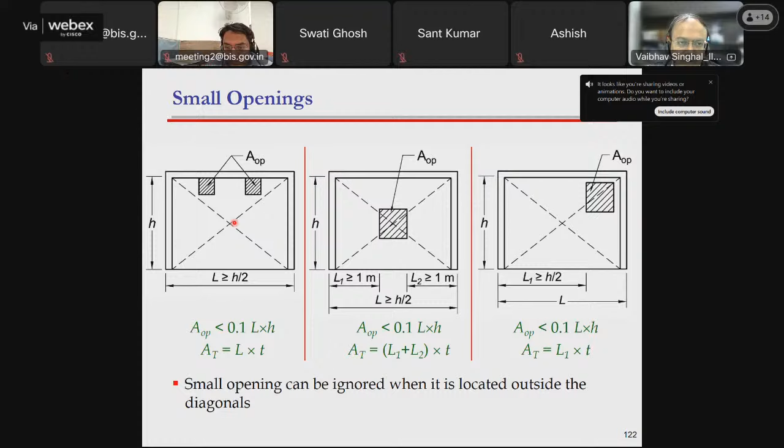Then another new concept has been introduced in the code. This is not included in the current NBC, but it will be included in the next revision. By using the wall density criteria, you can find out whether the amount of walls or the area of walls in any given direction is sufficient for carrying the earthquake forces and transferring the lateral forces. So these are all the new criteria coming in the code.

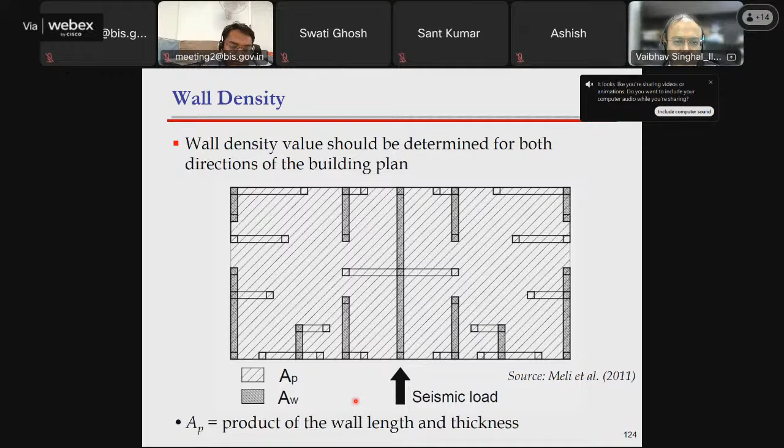Wall density means that if you take the total area of walls in a particular direction and divide it by the total building plan area, you will get some number. So if you want to find the wall density in the direction of seismic loading, you take all the wall areas, AW, and AW divided by AP, multiplied by 100, to get the wall density. Some numbers have now been given in the code guidelines, which you can use to check whether your building has a sufficient number of walls for a given seismic zone.

So all these recommendations are now given in the code, and very soon you will see a new revision of NBC and also IS 1905.

So thank you everyone, I hope I am almost on time as instructed by Abhishek ji. I just tried to give you a glimpse, as it is not possible to cover everything because the current NBC is very comprehensive. We do not have a dedicated standard, but NBC is going ahead with various recommendations for the design of masonry.

So if any questions are there from the audience.

Sir, thank you for your valuable insights on this particular chapter, because as you know, masonry is not quite popular among students compared to concrete and steel. But my question is, first of all, thank you for clearing the difference between frame structure and confined masonry. Earlier I was getting confused about what the difference between these two is, but thank you for this.

But I just want to know, sir, what is the condition of the slab? How do you construct the slab during masonry construction? Is the slab done similarly to how you do it for reinforced concrete as well?

So in a similar way, the slab is constructed. You will have beams, and if the room is small, then you can directly cast the slab over the wall. If you have a large room, then you can have intermediate beams to have a better transfer of forces. But construction-wise, everything is similar to how we normally do it.

In the older days, there were different methods of slab construction. If you look at the jack arch roof and other types of roofs, we used to have steel girders, and then over that we would put stone tiles or different things. If you're talking about reinforced brick slabs, they are not used nowadays, but reinforced brick slab construction is also similar to reinforced concrete slabs.